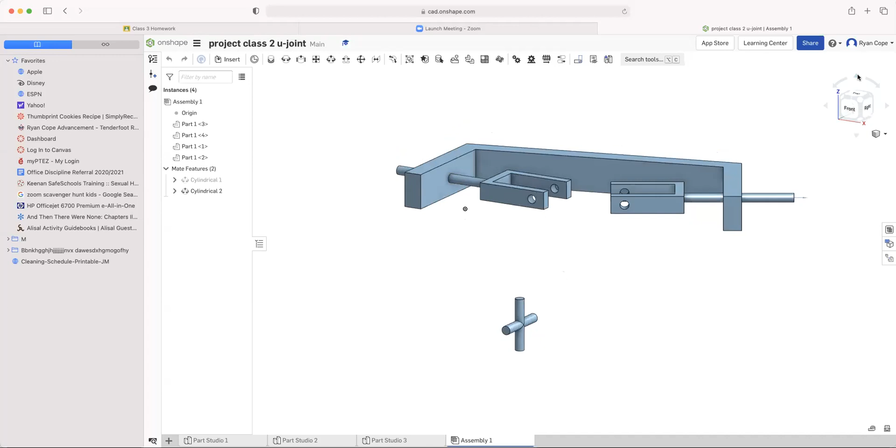He posted the photo of how to do it, but I couldn't access the photo, so I haven't done it.

For future reference, I think you should be able to access the slides on Google Classroom, and the picture will have been at the bottom of the slides. That's okay if you couldn't find it though.

If you go back to Onshape, it's pretty straightforward. So you have your cross there, right? Yeah. What you'll want to do is make a revolute mate with the circle on the inside of the clevis fork. Make sure the end face of that matches up with the outside face of one of the clevises.

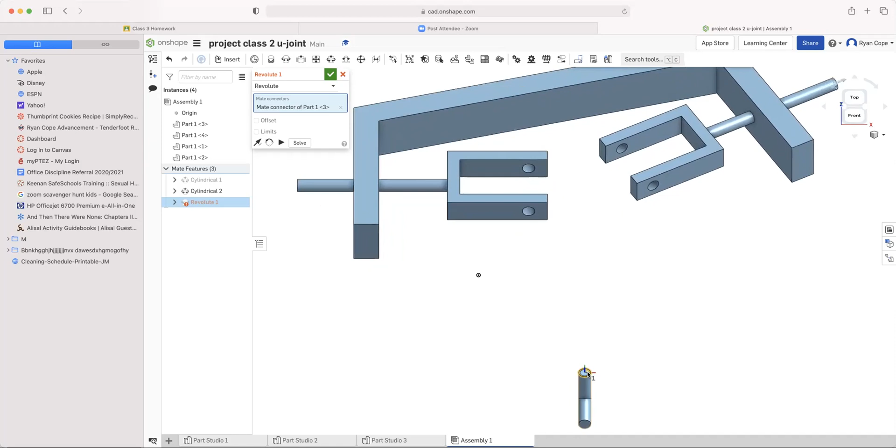Where do I attach it? Do you see the clevis, that outside face you were just hovering over? Yeah. If you click on the circle where that hole is, it should be able to mate to that. You can imagine that the little cross will be inside the fork. Right here? Yeah.

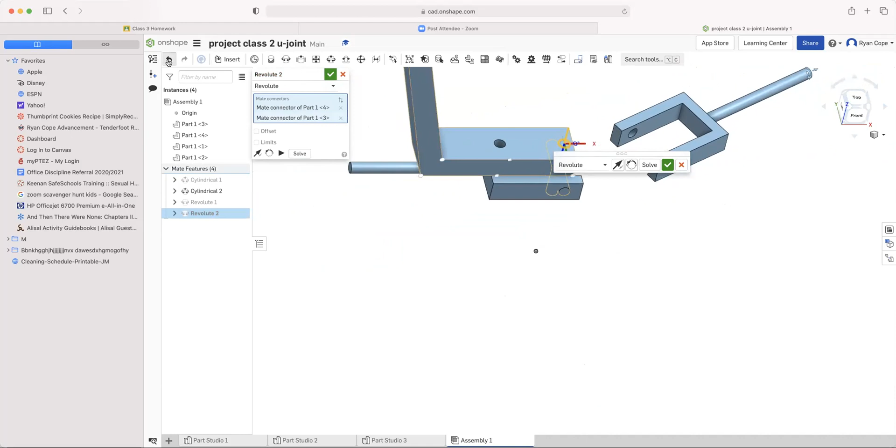All right, so that's your first mate. Now the other mate is exactly the same thing with the remaining two parts of it. I think you selected something you didn't want there. You take just the outside face of the other fork and you pick that other part of the cross.

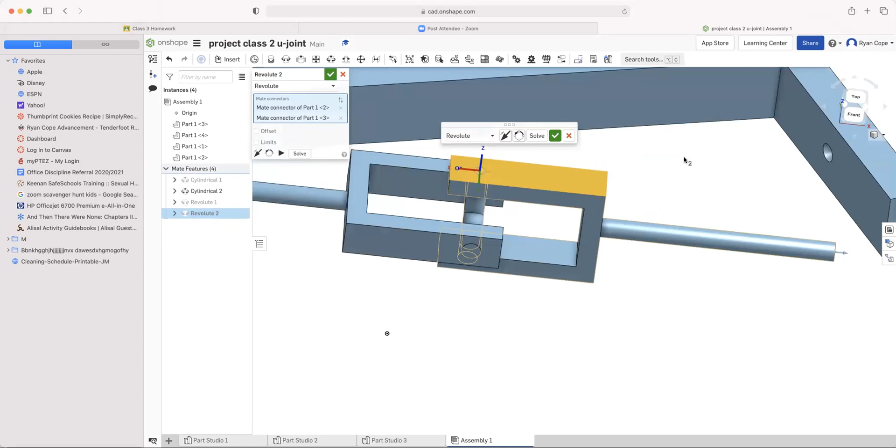And if you accept that and solve it, it should work. Yeah, so that looks good.

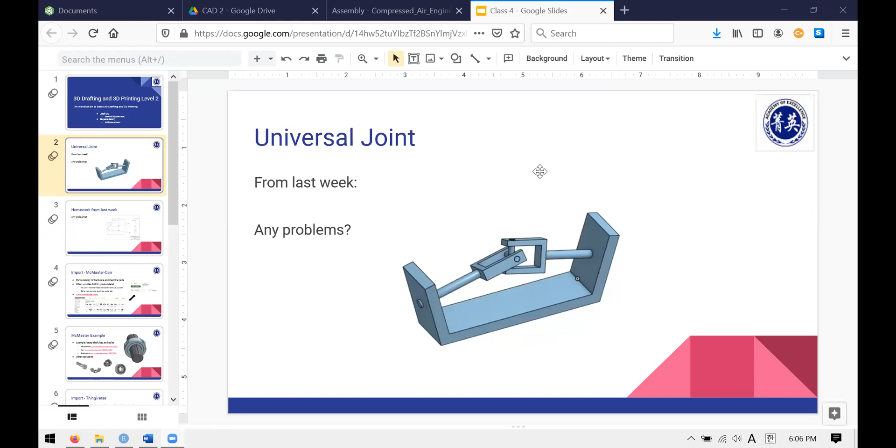The other thing that Jack asked you to do for this week was to model this base plate. At this time, I'll take any questions or problems. We can look at some problems you had with the base plate together. So just speak up, tell me if you finished it, if you didn't finish it, what your status is.

I finished it, but I don't know if it's correct, my dimension. So are you able to check it for me? Sure, we can do that. Why don't you share your screen?

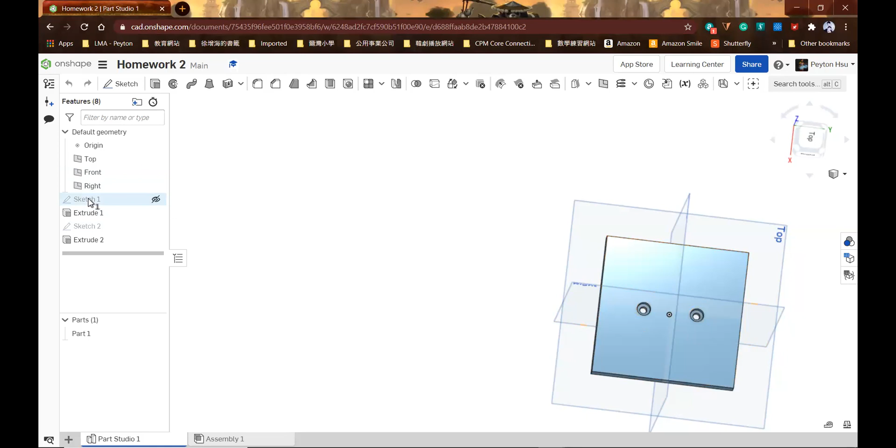So this is my first sketch I created. Oh, is this better? Yeah, that's better. All right, let's see. What part do you think might be, or what part do you want me to look at? I don't think this is the problem.

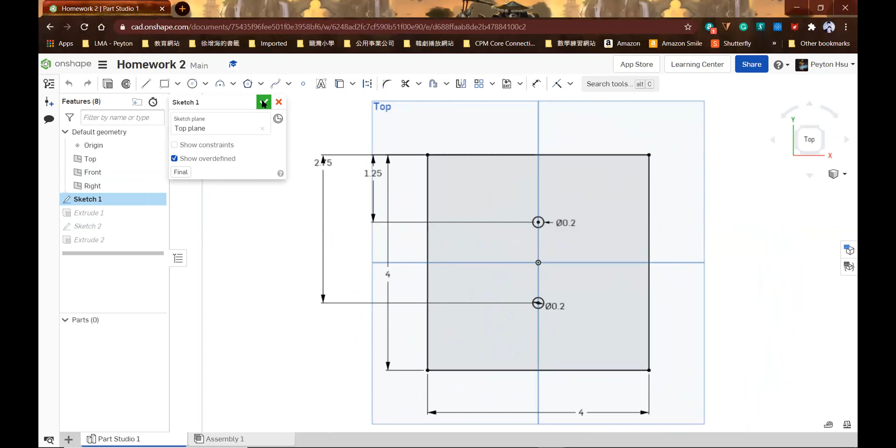I think it's the second circle. I don't know if this is 0.375. That looks right to me. The largest diameter of the hole should be 0.375.

So are these correct? Looks right to me. Huh? It looks right to me. Okay, thank you.

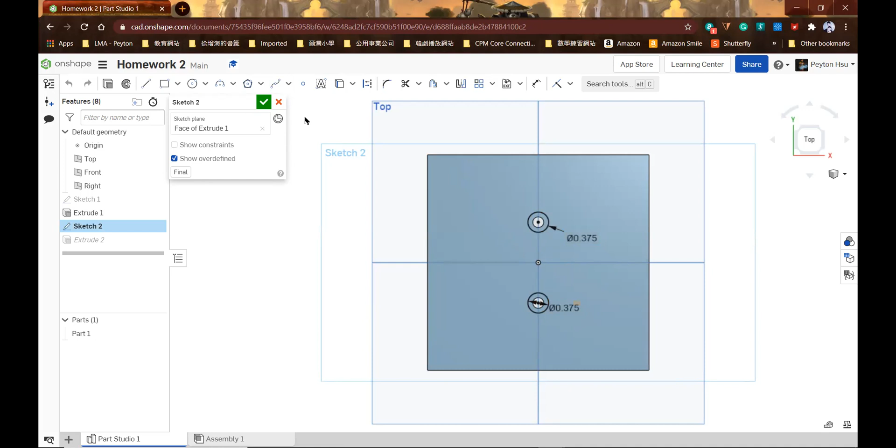All right, anyone else want to talk about the base plate?

Actually, I don't think I meant that base plate. I meant like for my U joint. I did the U joint nozzle and I did the cross thingy, but I didn't do the thing where I'm supposed to slide everything in.

So did you also not do this base plate? Wait, oh, sorry.

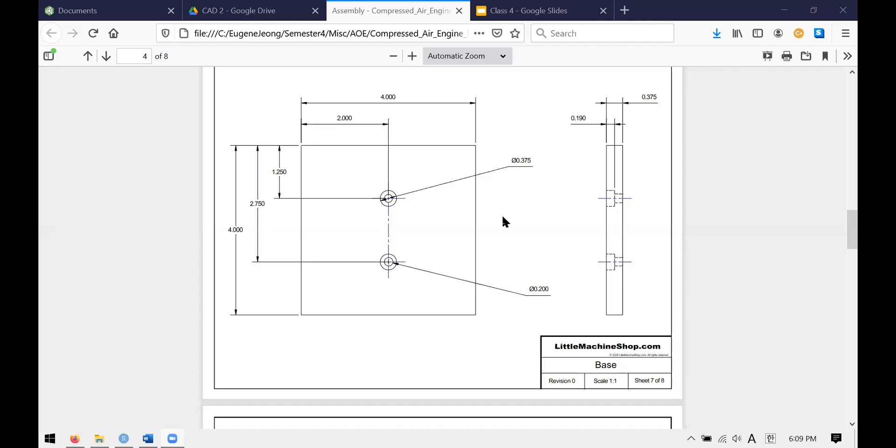Were you able to CAD this one? Oh no, because I couldn't get onto this. Or were you having a problem with Onshape? No, I just couldn't. It's hard to explain, but I couldn't get on.

So okay, we'll work through that after class. All right, can you log into Onshape right now? Because we'll be working on something together during the class period.

Alex, are you able to use Onshape right now? Yes. Okay, that's all that's needed at the moment.

So for everyone who couldn't finish the U-joint, as a blanket statement, just focus on this assignment and moving on. Like just start with the base. And if you really want to, or you have extra time, you can do the U-joint, but this one is more important since we will be using it in the coming weeks.

So if no one else has any comments about the base plate. So I should create a new document and create the base plate thing. Right, just make sure you have that for next class. Okay.

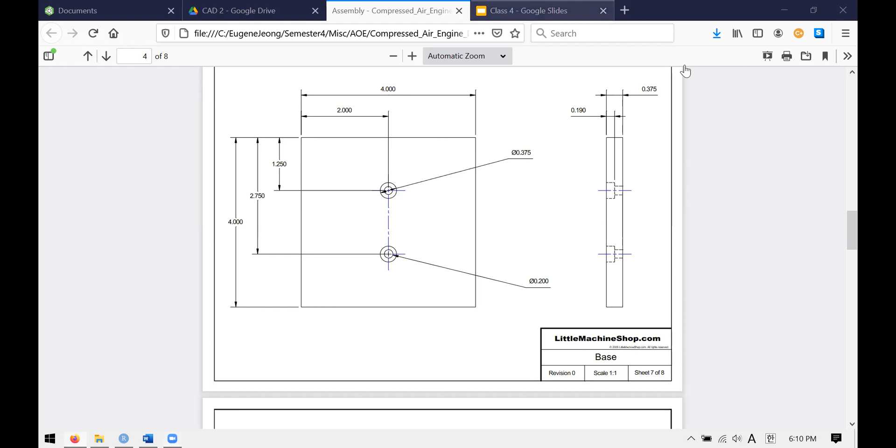Anything else about this baseplate before we move on?

All right, so now for the topic of this week, which is looking at importing parts into Onshape and parts catalogs and things of that nature. And so the first topic that we'll be talking about is a catalog called McMaster Carr.

So this is something called a part catalog. It used to be this really big telephone book-like book where you could open it up, look for whatever hardware or machinery parts you'd want, and then you could order it. These days, it's all on a website. And if you look through this website, almost every part you can think of, whether it's bolts, nuts, screws, bearings, replacement parts for your bikes, things like that, are all available on McMaster. It's often used in engineering for selecting various standardized parts for you to use in your designs.

One really cool thing about McMaster is that it often provides a CAD model of the part in its product detail. So when you're designing a part that has a lot of screws in it, there's no need for you to model every single screw by yourself because it's a standard part that's always the same. What you can do is download the screw or whatever it is from McMaster, and that's what we're going to look at today.

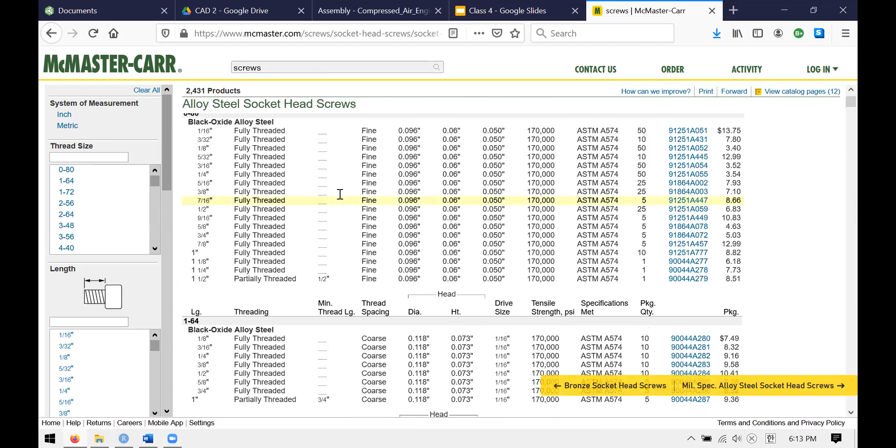And it would take me to this huge list of all these different kinds of screws. So how do I know what kind of screw I want? The first thing you might look at is the thread size. This is something that will come up shortly, but just to give a very brief overview of how screws work, most standard screws are described by two numbers. In this list, you can see there's a long list of one number dash another number. The first number describes how wide the screw is, that is how big a hole you need to put that screw into. And the second number describes the threads per inch.

And what that means, if you look at the screw, there's two parts, right? There's the head, which is where you put the screwdriver in, and then there's the long body. On that body, there's that spiraling part, and those are called threads. So the second number just describes what kind of threads that screw has.

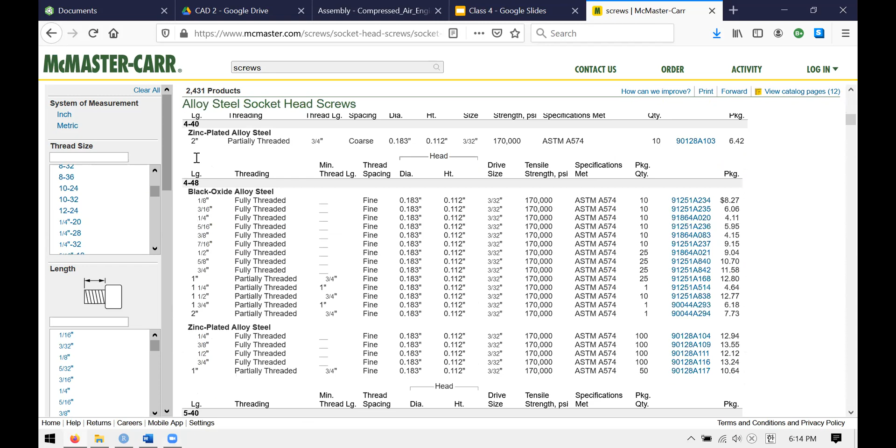For my part, I can just scroll down. Let's say that I wanted a 6-32 screw. Once I scroll down enough, I can see the entire selection of every 6-32 screw available on McMaster, and I can pick from these the length that I want. That's enough for me to land on a single unique screw, so let's say I want this 1 1/4 inch fully threaded 6-32 screw.

I want to put this into my CAD model. What I do is click it once, and I can click on the product detail. Not every product on McMaster has this, but a lot of them have this CAD icon, which means you can download the file. So you click this little dropdown, pick step, and download the file that way.

I'm going to do a longer demonstration of importing the part into Onshape, but for the moment, just take a moment to look around and explore the different types of parts you can buy. There's a lot of really crazy stuff here, and I'll let you explore. If you find anything really cool, feel free to type it in the chat and I can take a look.

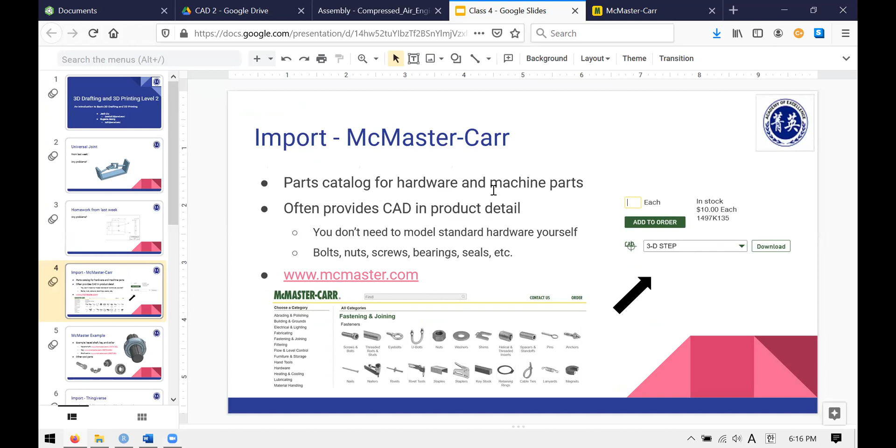So that's McMaster for you in a very quick overview. Now we'll go on to our example where I bring Onshape into this, and show you how you can use these models to make something interesting for yourself.

Each of these parts I found on McMaster. You can follow along, though you don't have to—I'm just going to show you how I'd download each of these parts. As before, I find myself on this product page. It has a little CAD symbol, so I know it offers a model. I click the dropdown and click step, and I can download that.

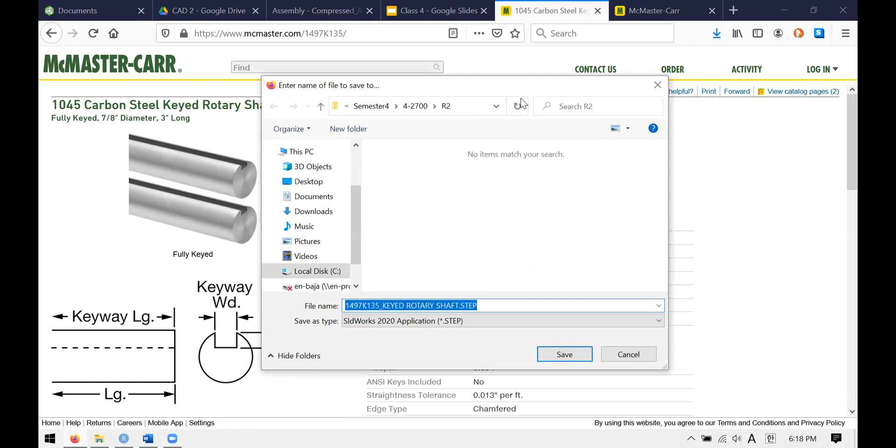Just like any other file, you can save it into any folder on your computer, maybe into downloads. And now that file, the 3D model of the shaft, is on your computer.

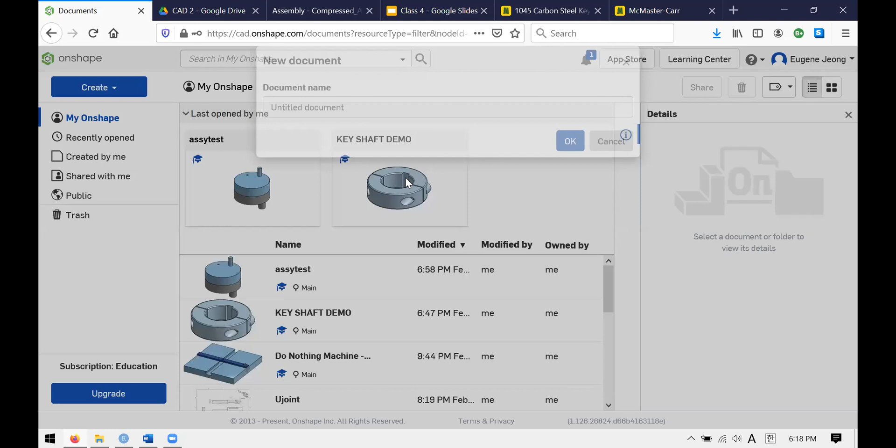Now we'll go on to Onshape. At this point, everyone should open up their Onshape if you haven't already. I'll make a quick demonstration—I've created a new document, nothing in it so far.

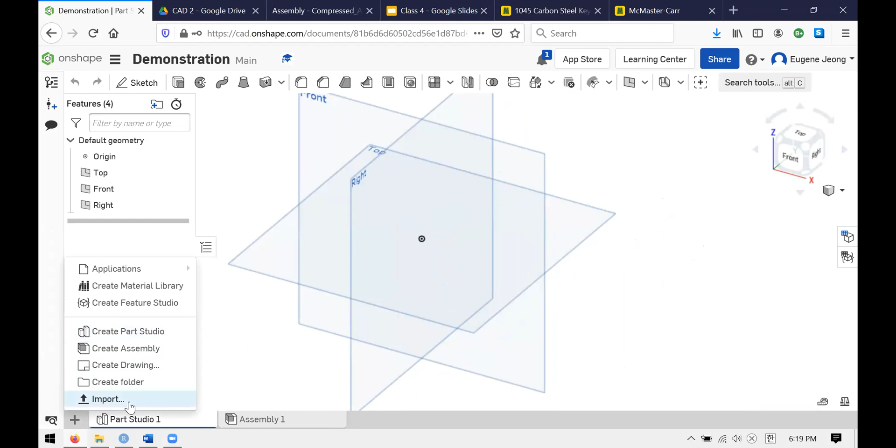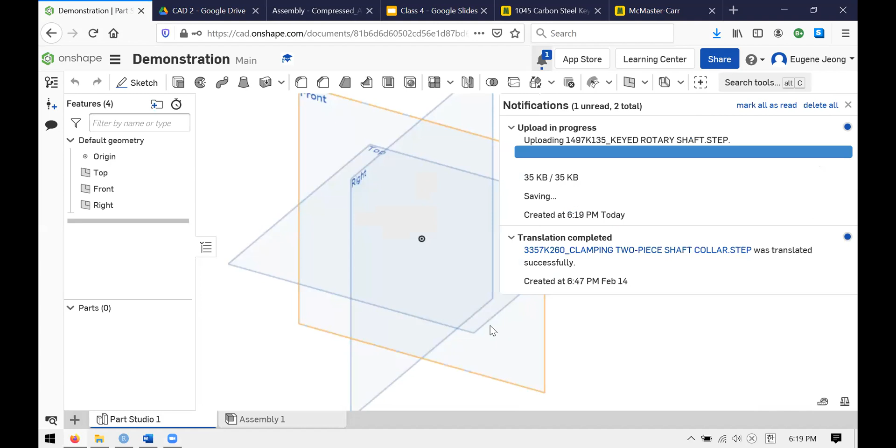Let's say I want to put that shaft into my document. I can insert a new element using the plus sign, and instead of creating a part studio, I click import. From there, I navigate to the folder where I saved that file. If you open the file, it brings up this dialog option—the default settings are fine. If you press OK, it takes a couple seconds, but it imports the part. Now I have that shaft I saw on McMaster, this 3-inch long shaft with the keyway channel, in my document.

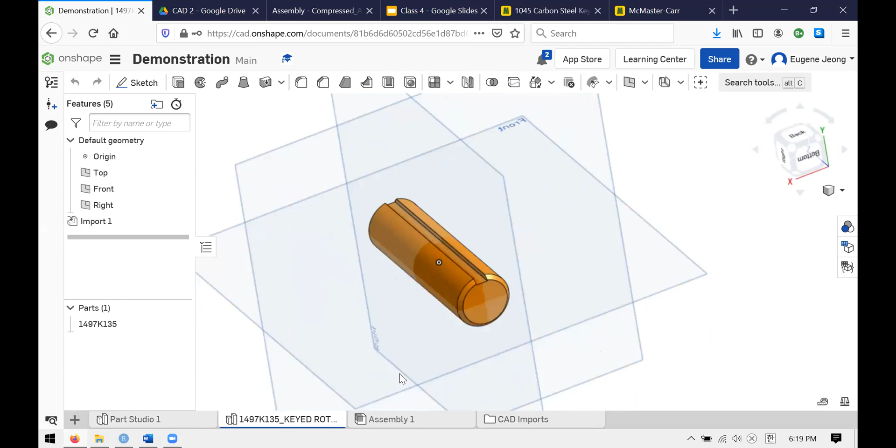So I can make an assembly with this, or modify it if I wanted to—it's here. I'll demonstrate that one more time for the shaft collar: again, you go to the product page, and you click download.

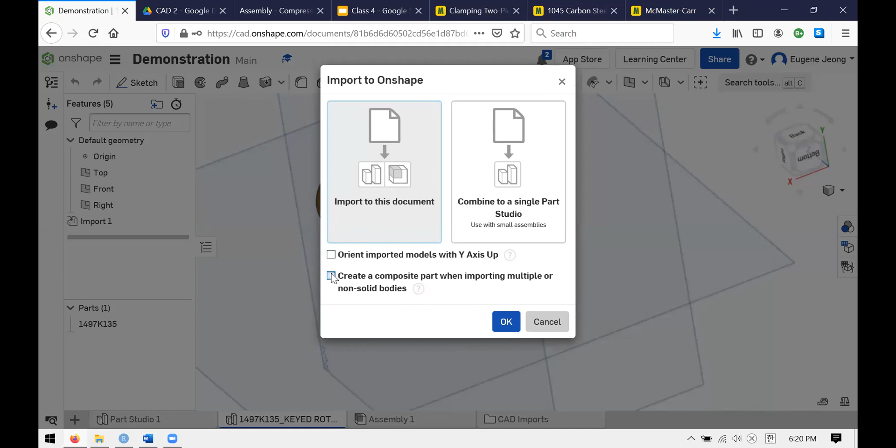Now this one is a bit different because the shaft collar, as you saw, actually consists of multiple parts. It has the screw on the side and it has the 2 C-shaped halves of the collar. So when you import something like that, where the model has multiple parts in it, you have the option of creating a composite part when importing multiple or non-solid bodies. What that means is if you're importing something that has multiple distinct bodies in it, like the screw and the 2 C halves of the collar, it just imports that all together as one body, or if I don't check it, as separate bodies. That's something to keep in mind if you ever do something like this on your own.

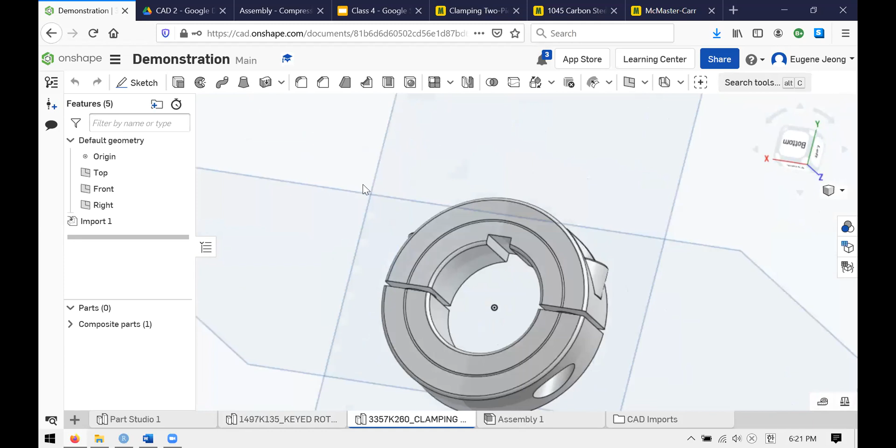But if you give it a second, it'll show up. Since I checked yes on that option, this whole thing now came in as a single body, so everything's attached to each other, which is what I wanted.

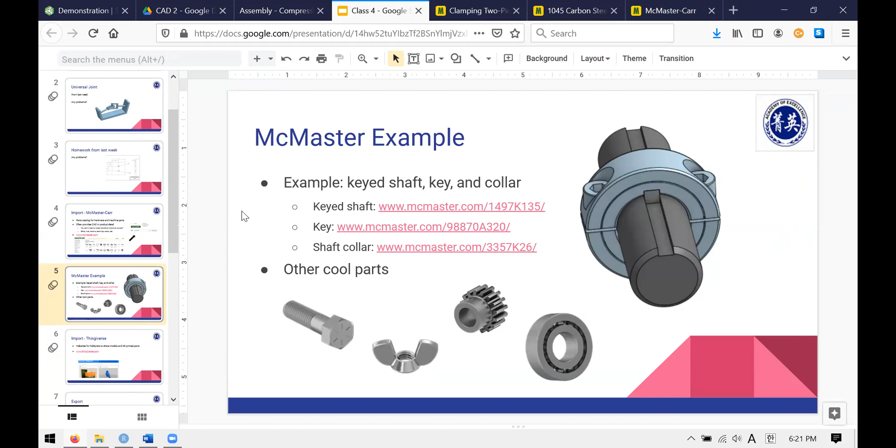All right, so that's McMaster. If you want, you can play with that in your own time. It's very useful. I use it all the time in my own school classes and for my own projects.

The next thing I want to show you is a different kind of website. This is Thingiverse. If you're interested in 3D printing or hobby making of things, this is a good website where a community of hobbyist 3D printers or model makers submit things they've made for everyone to enjoy. I'll put the link into chat as well.

So this is a bit different from McMaster, where the parts you find aren't necessarily standard hardware like screws, bolts, or bearings. Instead, it's just things that people wanted to make. There is a search option, and I'll give you another moment to look through this on your own and see what you can find.

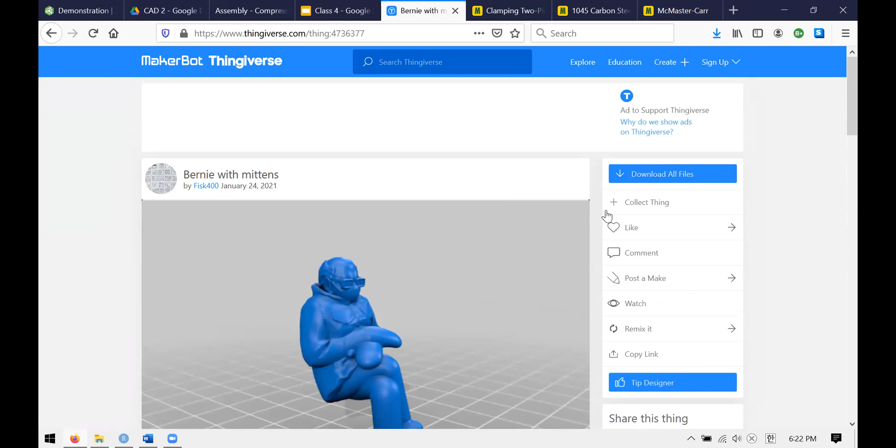I'll demonstrate how you can download models. Let's say I really like this statue. I click on it and it brings me to this page, and then I can download all the files. There's a short countdown, and after that it prompts me to download that file, which you save like any other file onto your computer.

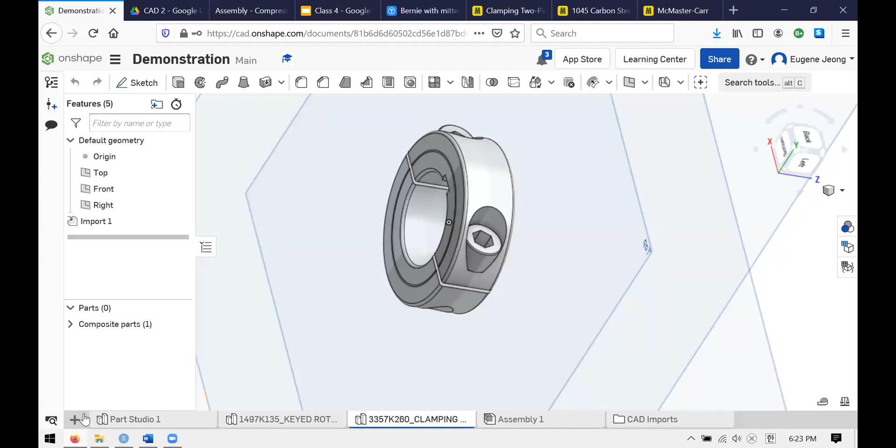What's often the case is that it gives you a zip file, so as you might know, you can just right-click it and extract all, and it puts the file onto your computer. Just like we did with the McMaster screw, you can import that part by navigating to it and selecting it. Once it finishes, that part will also just be in your document. So if that's something you wanted to 3D print, that's how you would first get it onto your Onshape.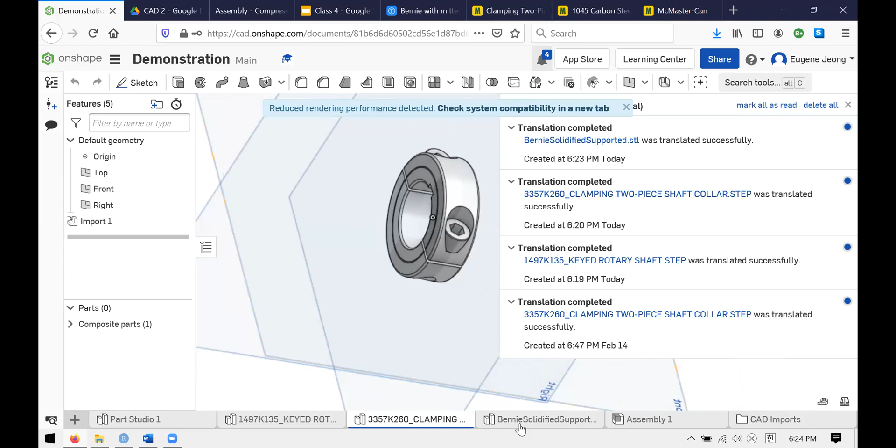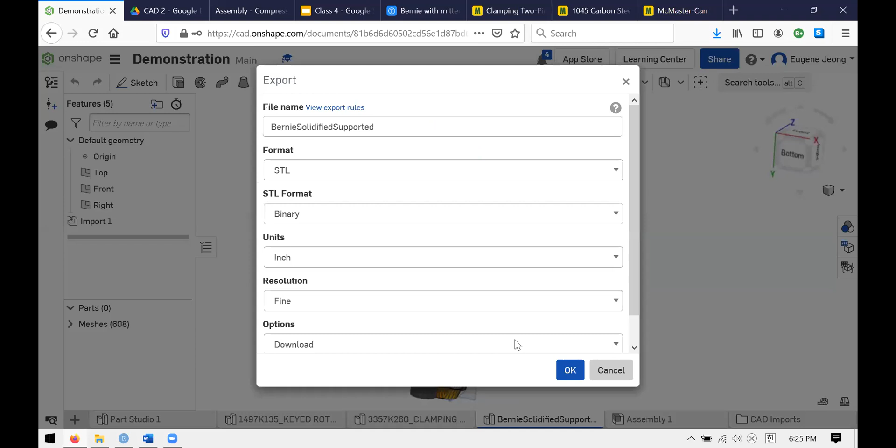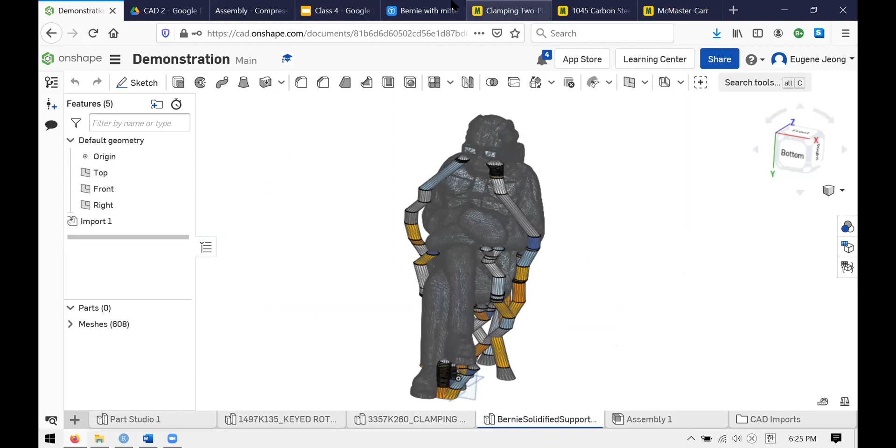Let's go to this statue that I downloaded a second ago. Here it is, and let's say I want to move this onto my 3D printer. What you can do is right click on that tab, click export, and in the format you just pick STL. You can adjust this if you want, but we'll talk about that in the future. You can just download it, and that'll put an STL file of the model you made onto your computer. That's one of the first steps in the 3D printing process.

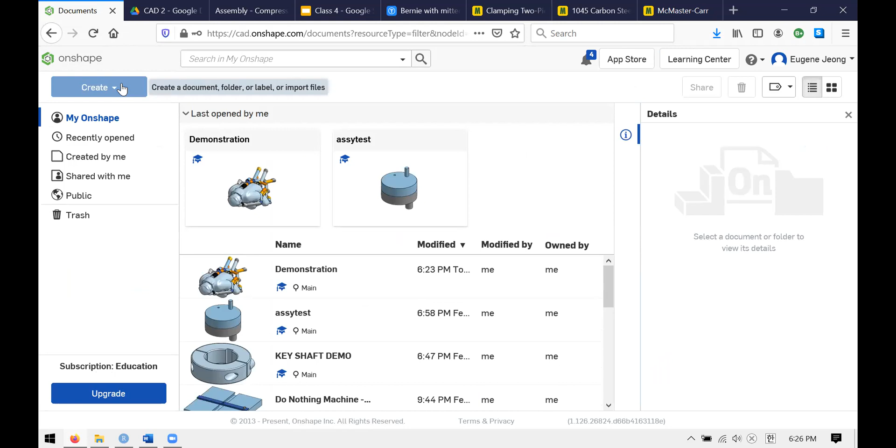So we'll begin today with the cylinder. Again, we're modeling from a drawing, as we talked about in previous classes. If you've already made your base plate, I want you guys to work in the same document that you made the base plate in. Here, I'm just creating a new document for the demonstration.

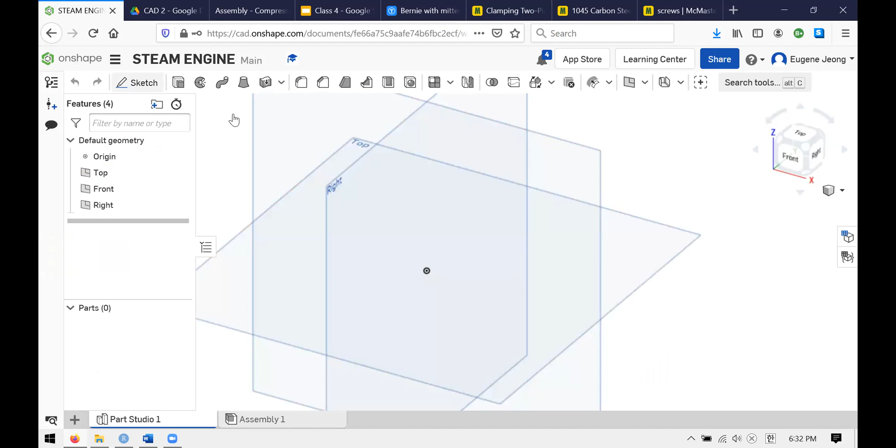So yeah, at this point, I'll start making the model. You guys can follow along or go at your own pace if you've already started. But the way I'll go about this is start with a little square.

I remember from my drawing that when you look at it from the top, it's a 1x1 square. So I just made my 1x1 square.

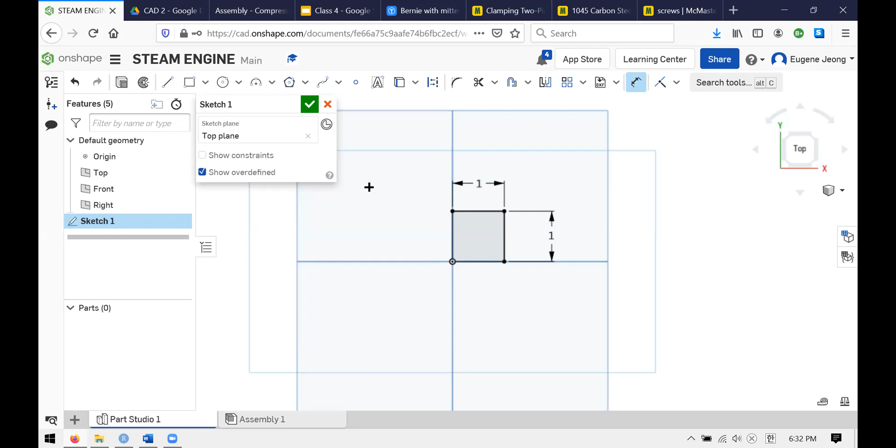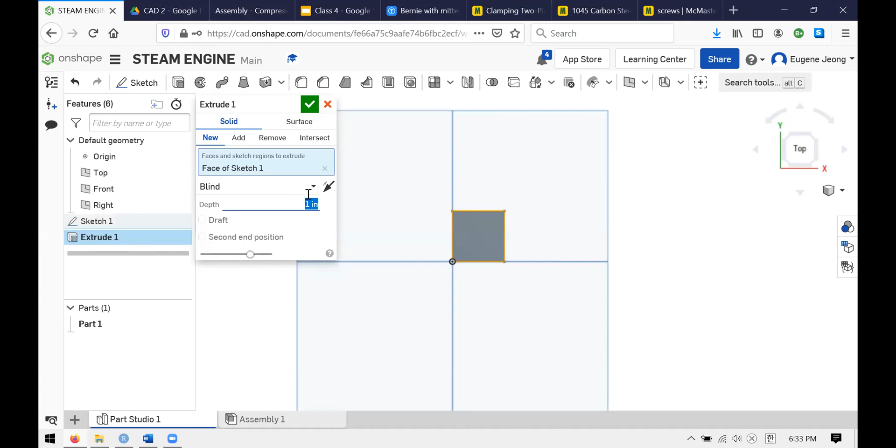And then I want to extrude that square. And to know what height I want to extrude this to, I look back to my drawing and I see 1.875 as the total height of that block. And that's what I'll make.

So now I have this block that makes up the bulk of the part. And now I have these 3 holes.

I'm going to start with the biggest hole. And I'm going to teach you something perhaps that you didn't know before, which is how to easily make that drilled feature with the pointy tip in one feature.

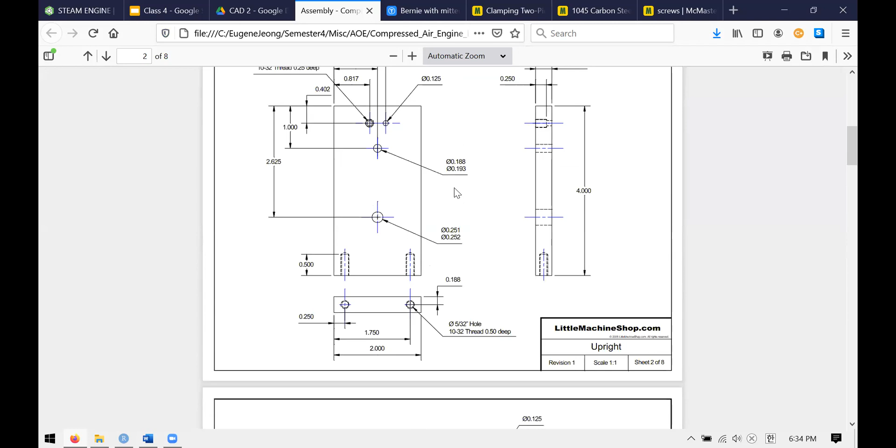Yes, Peyton? Where are the dimensions? Like, is it in Google Classroom? Oh yeah, the drawing is in Google. The slides are in Google Classroom. There's also this PDF file that should be in Google Classroom as well. And if you scroll, you can see a bigger version of the image. I guess at this point, I should probably get the Google Classroom code for Andrea. Is that your question?

Andrea? Wait, how tall was it again? 1.875. Okay. Do you need the Google Classroom? Does anyone need the Google Classroom code right now? I don't have it right now.

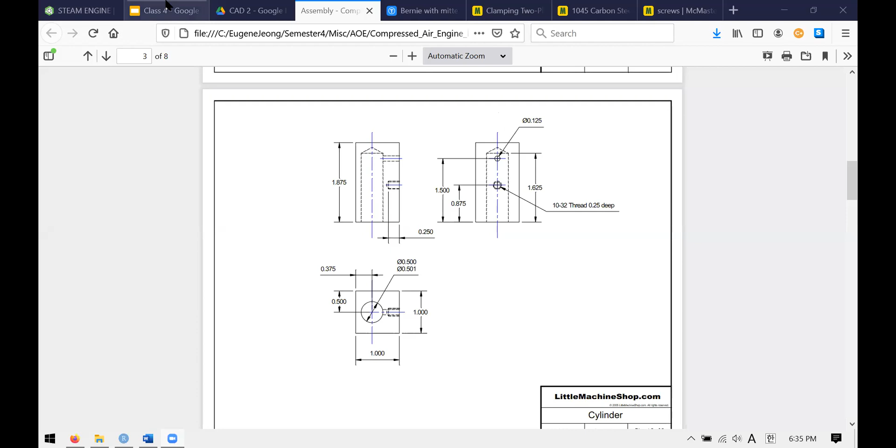So the next thing I'm going to do is work on this large hole. I'll make a sketch, pick this top square plane, and on this plane, instead of making a circle, I'm going to pick this point tool and put a point, a little blue dot, on my sketch.

And if I look here, I know that the center of that circle, which is what I made that dot for, is 0.5 and 0.375 away from the corner. So I click the dot.

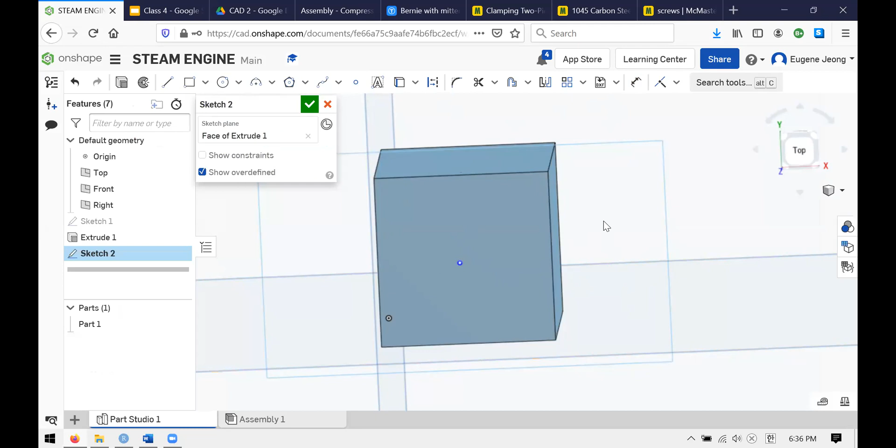I click this - wait, that kind of looks like a square to me. For me, I got a rectangle. Do you mean this? Oh, oops. Yeah, I couldn't see that.

Okay. So when you have this rectangle, I just want you to make a new sketch on this square. So you're right that it was a square - I was just looking at it head on.

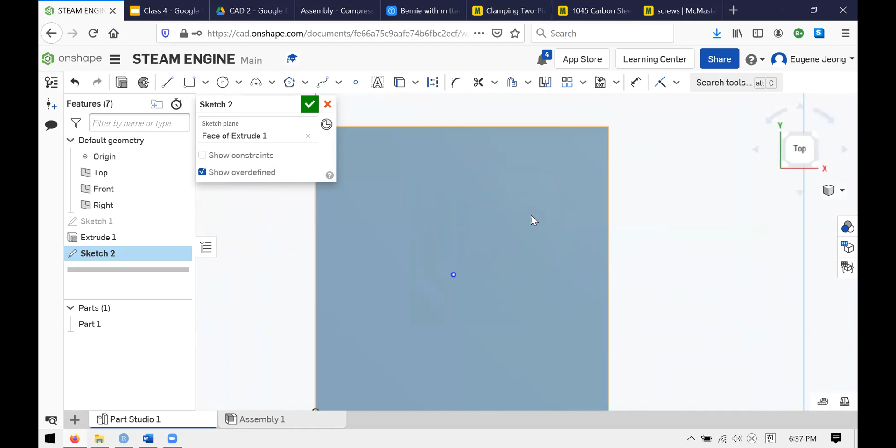Andrea, do you still have a question, or is your hand raised from before? Okay.

So as we were doing, you click the line, you click the dot with your dimension tool, and you make that 0.5. Wait, where did you make the dot?

So in your toolbar, there's a tool called point. It looks like a small blue circle, and it's between the spline tool and the text tool. You can just click on it once, then click on the square somewhere, and it should place a dot. Let me know if that works.

Yeah, it works. All right, so I just want you to dimension it as we see in the drawing: 0.5 away from the top, and 0.375, or 3/8, away from one of the sides.

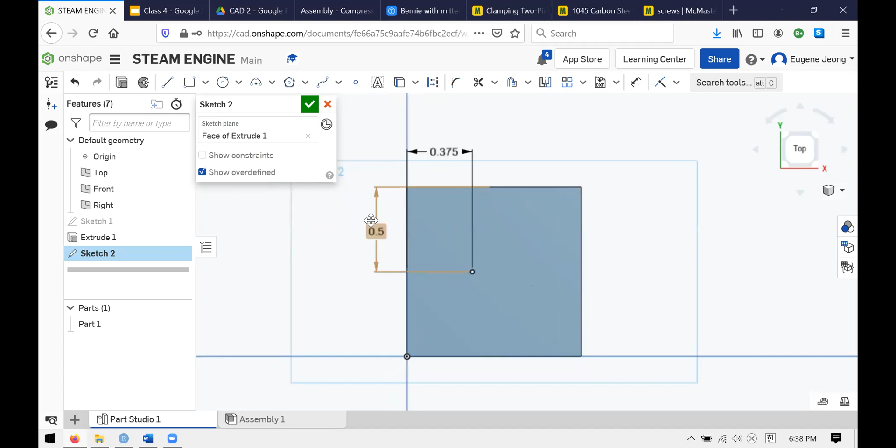Wait, what were the dimensions? 0.5 and 0.375. 0.5... wait, 0... and 0.375.

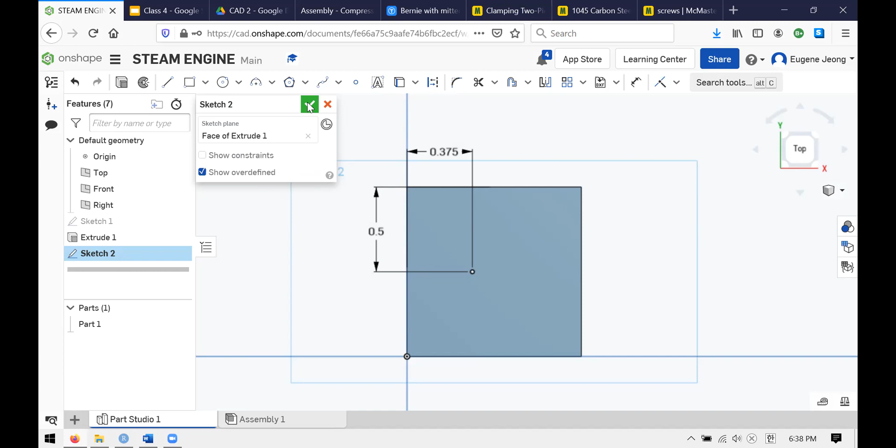I see. I'm not too sure about that right now, but we'll address it after the class. For now, could you just follow along with what I'm doing? Okay. And I'm sorry about the Google Classroom issue, but we'll make sure to look at it. I have a question. Yes. Can I share it? All right.

For this one, I didn't get how to dimension it. That's 1 inch and 1 inch.

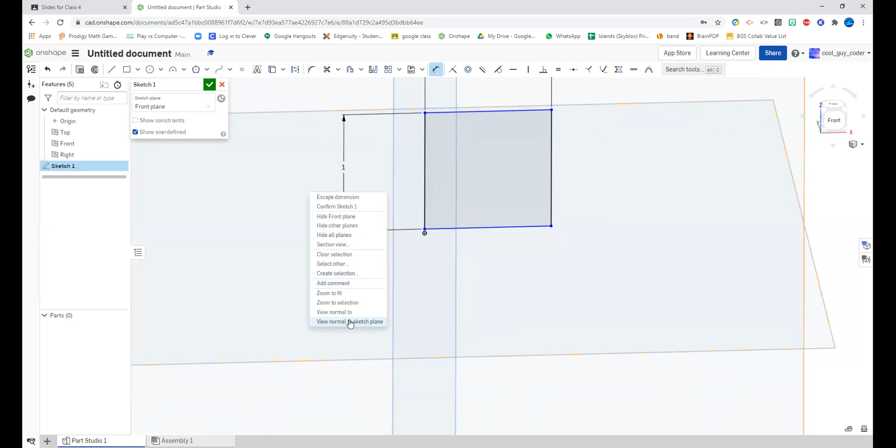No, I didn't get the square part. What do you mean? You have to put a circle in the middle and dimension it to 0.375. Sorry, it's hard for me to hear what you're saying.

I don't know how to do the dimensioning. Okay, I see. So first, you can see your square isn't fully defined yet because it has some blue lines, right? Do you know what's not fully defined about this? The distance between this and this.

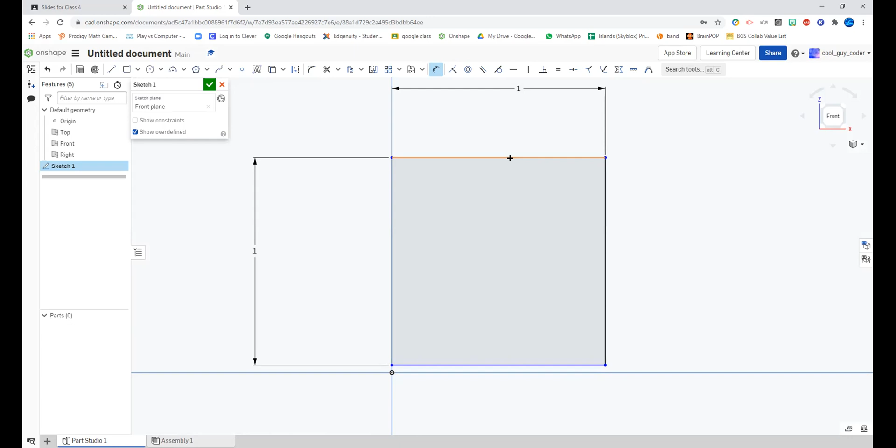Try clicking it and dragging it and see what happens. Or escape out of your dimension tool. Click the line and just drag it. So the position of that square was what wasn't fully dimensioned. Oh.

Okay, now it's good, it's all black. Now I want you to click the point tool, which is the blue circle next to the spline tool, and just click it.

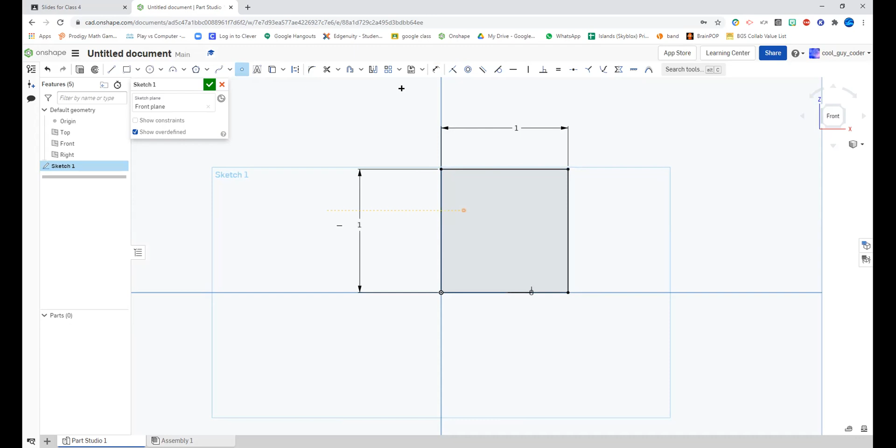And I want you to dimension that so it's 0.5 and 0.375. Thank you.

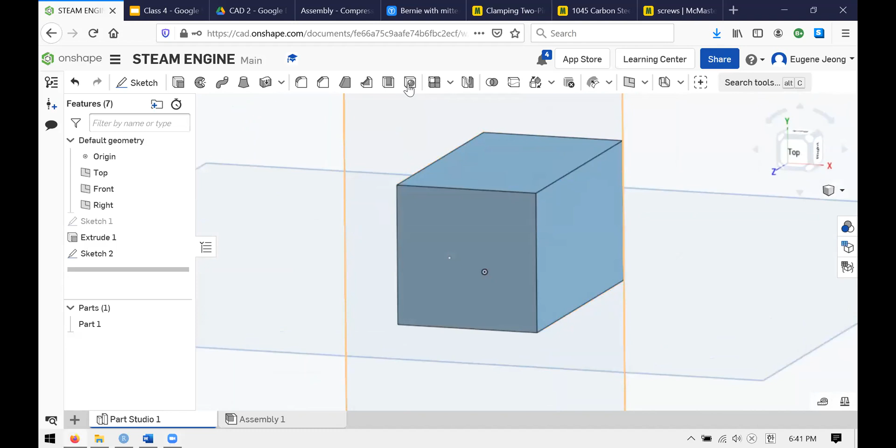All right, so at this point we have this rectangle. What we can do is use this tool called the hole tool. How much do I extrude it by again? 1.875.

So the hole tool gives us a lot of different options. ANSI, ISO, DIN, and PEM are all different standards. If you go to your hardware store and look at various screws, rivets, and bolts, they follow these various standards. But for now, we're just going to click custom.

Let's look at our drawing. Here we see it has two numbers that indicate the diameter of the hole, and that is a tolerance. It's telling the person who would make this object in real life how accurately they need to make it, no less than 0.500 inches and no more than 0.501 inches. For us, we don't really care about that since we're not making this in real life, so I'm just going to put 0.5.

For the second part, I want the depth of the hole up to this flat part, called out as 1.625. That's the dimension I can put in here.

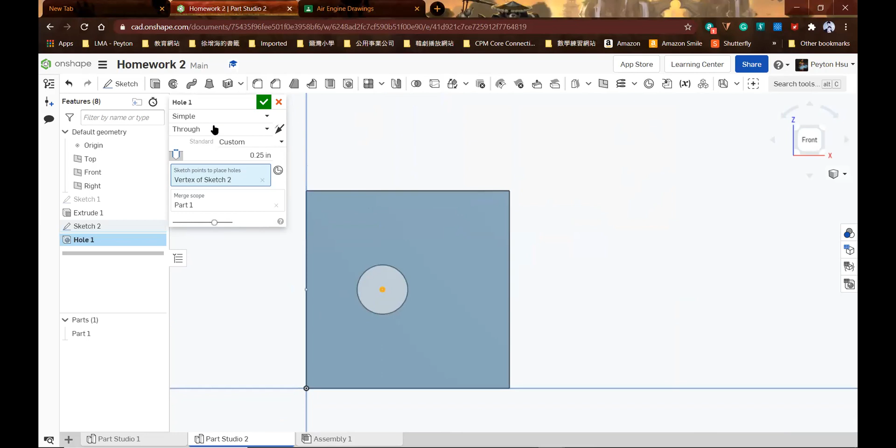Okay, so that's because you selected 'through' for your second drop-down option. What through means is it's going through everything, so you don't need to specify a depth for a through hole. If you click the drop-down next to through and select blind, now it's blind, so it doesn't know how deep it has to go — you need to tell it, and that's how you bring up the second option.

Okay, thank you. Is everyone else good with the hole tool?

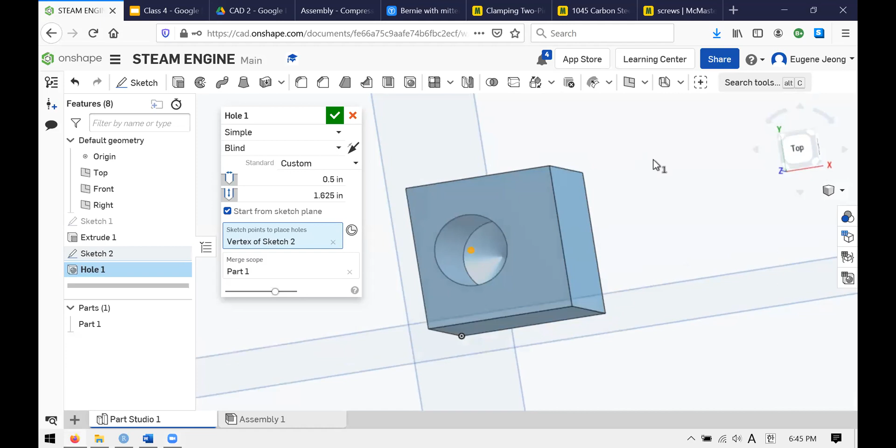All right, so I'll make that feature and you can see inside it has a little conical shape, which means it's accurate to what is made in the drawing, since it has that taper to represent the drill bit. Now there are two more holes we need to make before we're finished with this part, so we'll make those now.

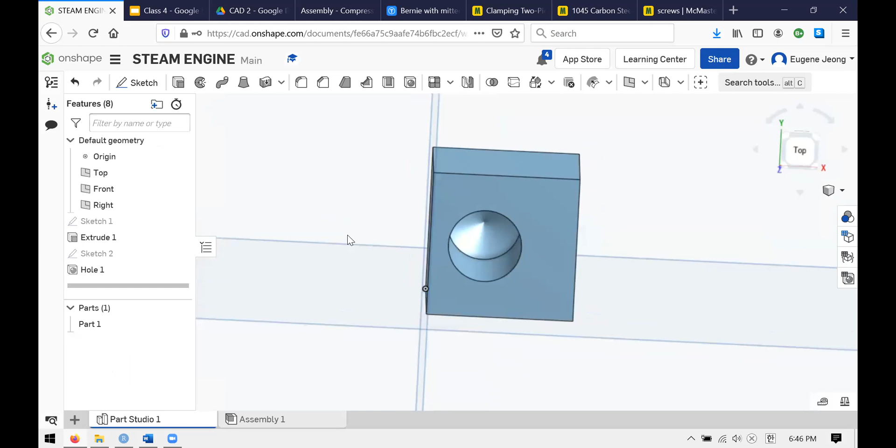This is a part where you might have to be careful. First, look directly on the top of your part. You can see that the hole we just made is closer to one side than the other, right? So we want to draw on this face where it's farther away from the hole. If you look at the drawing again, you can see what I mean — the holes go through the thicker part here.

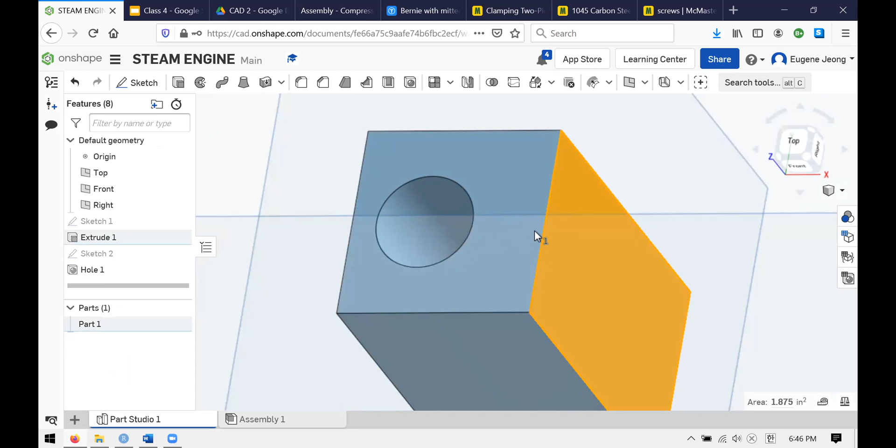So if you look at it this way, this is what it should look like. I just want you to make a sketch on this rectangular face.

Are y'all good with picking the next face to draw on?

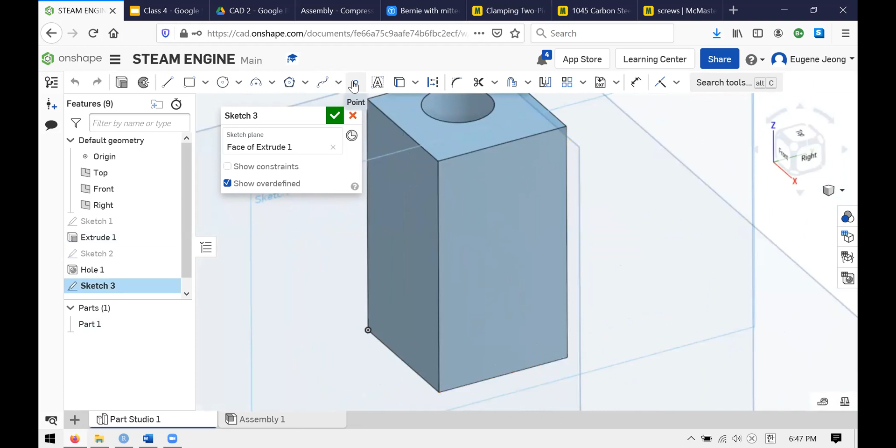As before, on the sketch, I want to eventually make 2 holes in this plane. So I click the point tool again as before. I click once to make one point, and I click again to make another point. And that's what I have.

If we're good up to here, I'll start dimensioning it. As someone pointed out before, there's a blue line that indicates symmetry, so I know that these holes must be centered. So I'll use the dimension tool. I know this is 1 inch wide, so half of 1 inch is 0.5, and that'll make it symmetric.

I click the point, I click this line, and I do it to 0.5 inches. I do the same thing for the other point: I click the point, I click the line, and I make it 0.5 inches.

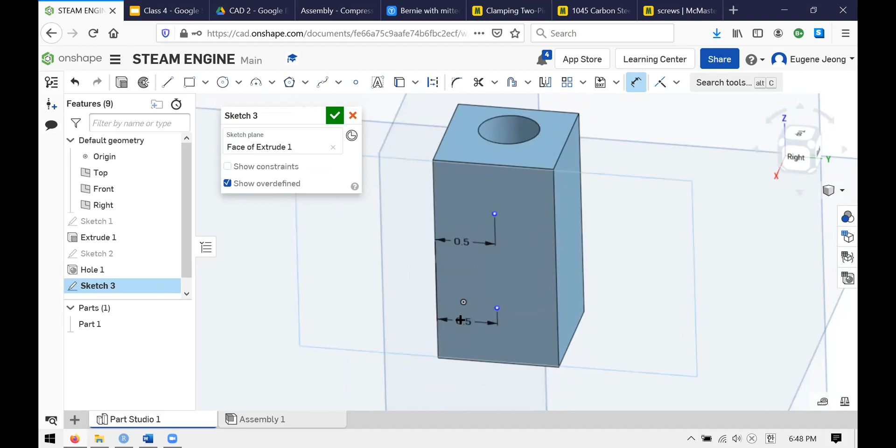Is everyone good up to here?

All right, so finally we'll do the last 2 dimensions, which determine where the points are vertically. If you look carefully, the opening of the hole is actually at the bottom of this block. You can tell because the little triangle, which is the bottom of the hole, is up here. So we're dimensioning from the part where the hole opens.

The first dimension is 0.875. So from where the hole opens, which is here, I click the line, I click the point, and I put in 0.875.

The next hole, again, it's dimensioned from the opening, 1.5 inches. So I click the point, I click the line, and I put in 1.5. That should fully define your sketch. Let me know, just type yes in the chat or give me a thumbs up if you're good with this.

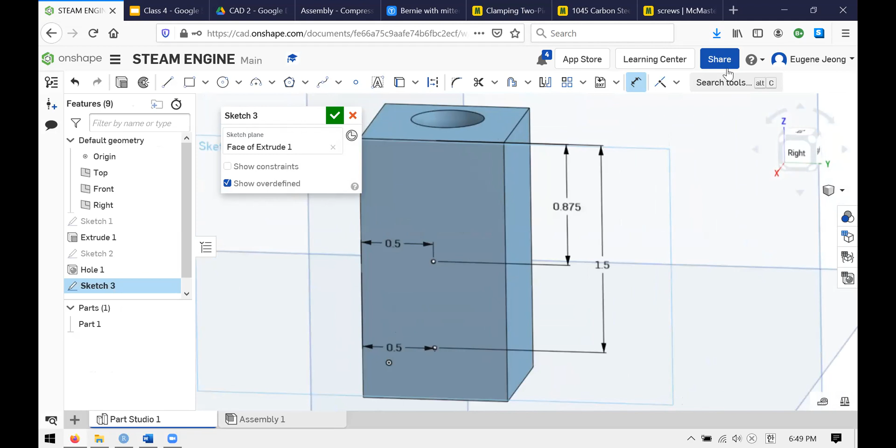All right, seems like we're all good.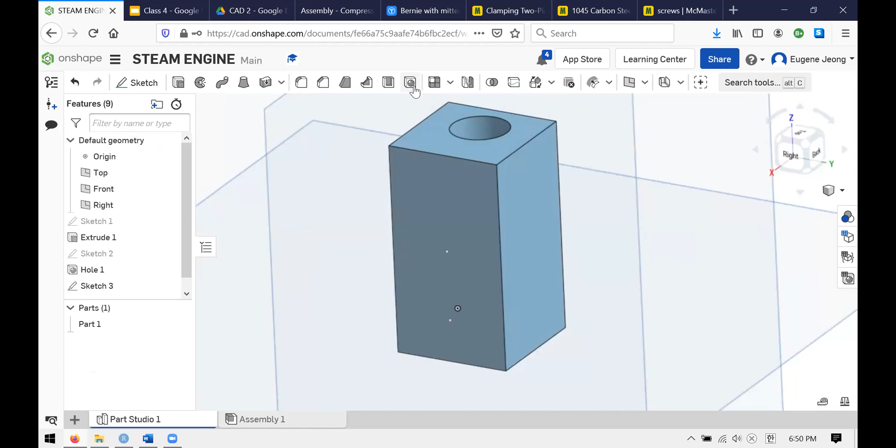So what we're going to do now is something a bit different. We see here there's the 10-32 thread, 0.25 deep. This is where the hole tool really comes in handy, because it allows you to make standard sized holes like a 10-32 with just a few clicks.

So again, hole tool: we want a blind hole, not a through hole. And we want to click ANSI. We want a clearance. And then for the size, we want to click number 10.

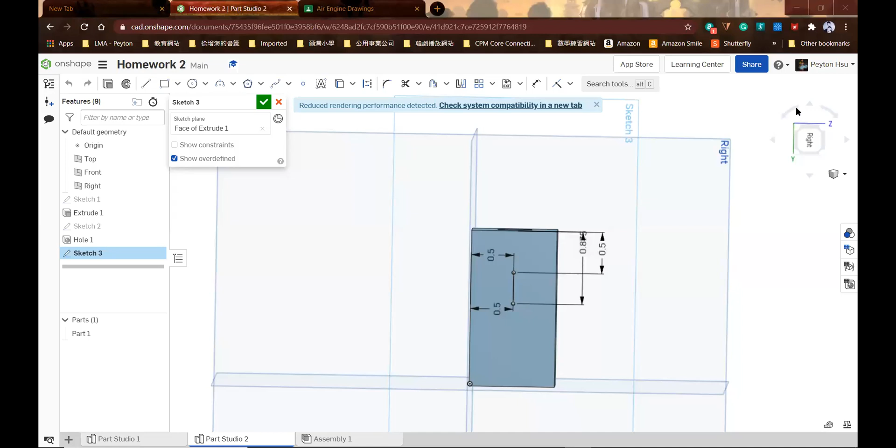Sorry, or Peyton, how come your dots are lower than my dots? When I go to sketch 3, I did the same dimensions, but mine's higher than yours. Do you want to show me? Yeah, right here. Oh, oops, but yours are down so here, that's a quick fix. It's not 0.5, but 1.5 for the dimension of that hole. Oh, okay, yeah, thank you. I guess miscommunication there.

And sorry, it's not actually a clearance hole. I misspoke there, it should be a tapped hole. So I'll run through it again: use the hole tool, you want a blind ANSI tapped number 10 hole, and you want 32 — that's what the 10-32 means in the drawing. You can leave that at 75%.

And so it already automatically fills in for you this diameter based on these numbers that you put in. All you need to specify is the depth. If you look at the drawing, it says 0.25 deep — that means the hole depth you want to make should be 0.25.

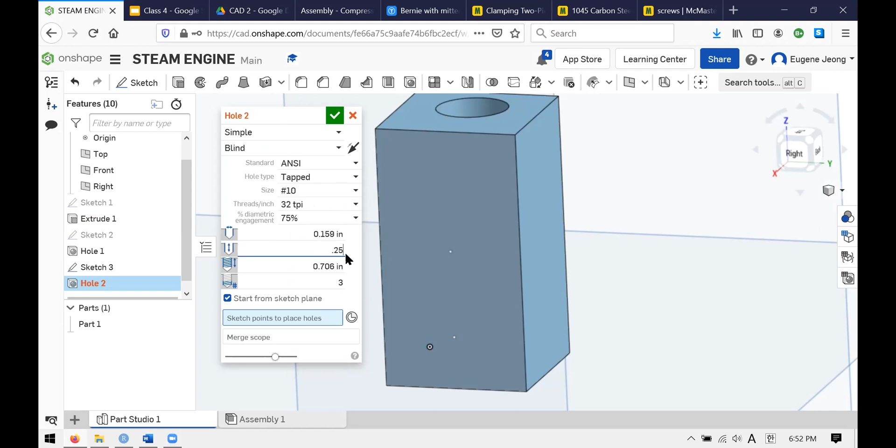And the hole that we're doing right now is the one that's closer to the opening of the hole, kind of the one in the middle. So you select that one, and that's the hole you want. Let me know if you get to this point, or if you have any problems.

Again, an ANSI tapped 10-32 hole, that's 0.25 deep. If we're all good, I'll resolve the feature. And we have our first hole.

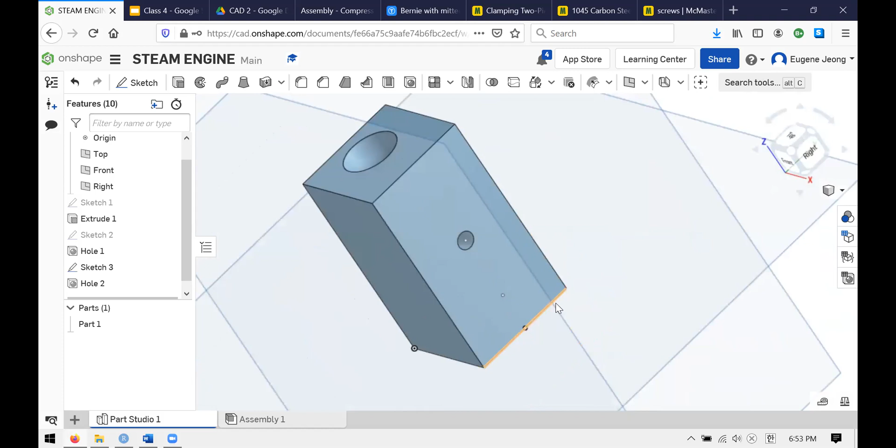Now, one thing that happened is since it made our hole with that sketch, it made our sketch disappear. What you want to do is go over to your feature tree on the left and click the eye — it'll make the sketch reappear, so you can see your sketch again with the 2 points. And we're going to now make another hole with our hole tool.

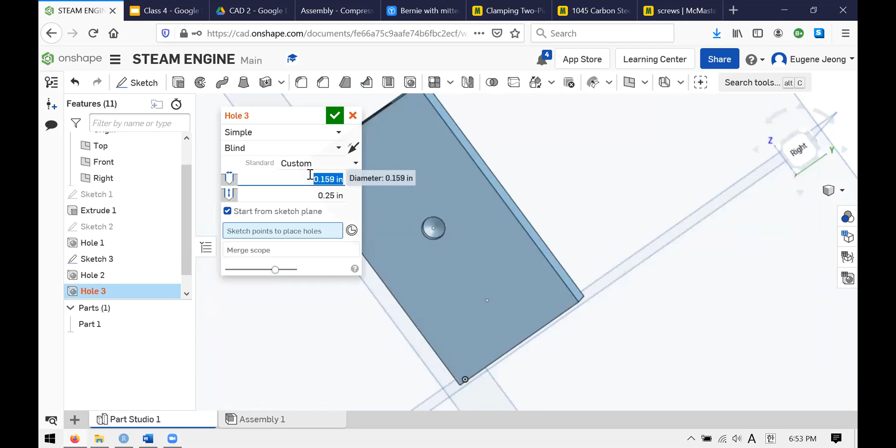Again, we're going to make a custom hole. Since the diameter of this is 0.125, we'll make the diameter 125. And we'll make the depth 0.5 inches.

And if you look inside, you should be able to see the hole come out through into the hole. So is everyone good up to here?

Peyton? Well, what does it mean by merge scope? So merge scope refers to whenever you make a new feature, you have a lot of...

I guess to explain it, let's take a different example to explain what scope means. So let's say that I make a square and I extrude it into this block. So that makes my first body, so to speak. And then let's say right next to it, I draw another square and I extrude that into a block. Now I might want those two to be one part, just together, one part that looks like two blocks, kind of like a square snowman. But I might also not want that. I might want those two to remain distinct things.

And in that case, the scope would be different, because if I want to make them one thing, the merge scope would be to part one, where part one is that first extrusion that I made. So with every feature, there's a possibility that what you're making might not be intended to become a part of what it's on. Merge scope allows you to clarify that, but we don't need to mess with that.

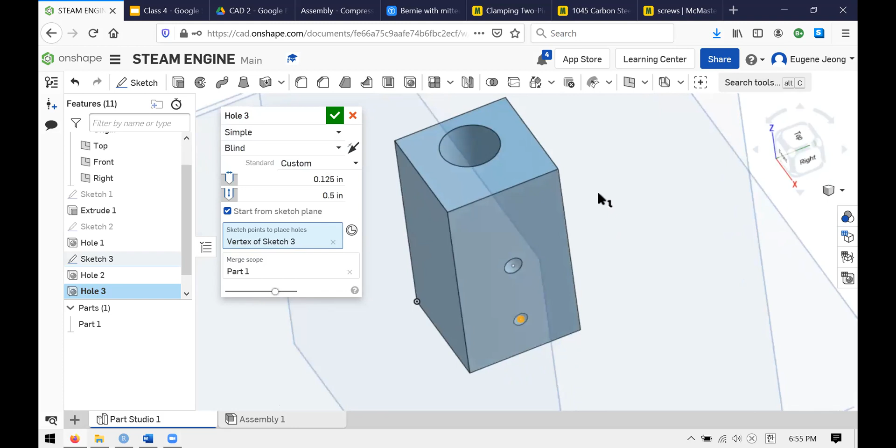Peyton? Just wondering, on the engineering side, how do we know how deep it is? Oh, okay, good question. In this case, I knew that a blind hole of 0.5 inches would go far enough to enter this hole.

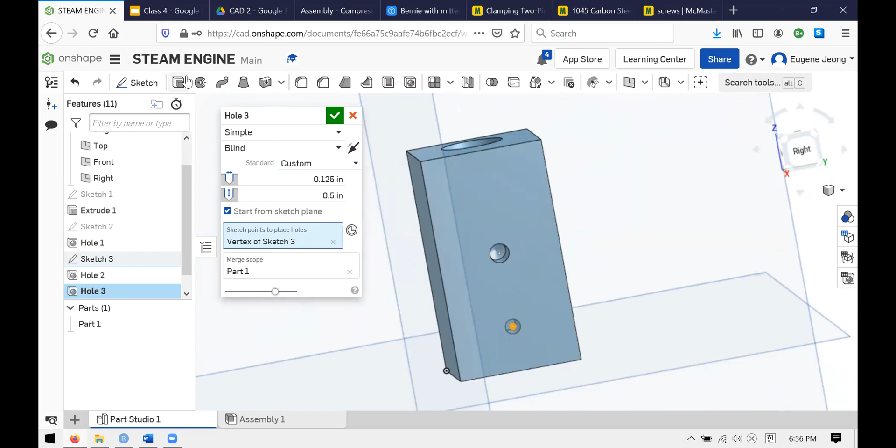And if you look at the drawing, it doesn't specify how deep it is, because it shows in this view that it goes into this hole. A different way to do this would have been, instead of making a point drawing here, I could have made a circle drawing that's 0.125 inches in diameter, and then I could have done an extrude cut. What an extrude cut allows you to do, if you remember, is an up to next. So I could have just selected the cylindrical face here as my up to next, and it would have created an extrude cut of 0.125 in diameter up to that surface.

The 0.5 was just a number that I knew was big enough to reach this hole. So it wasn't an explicitly stated dimension, but there are multiple ways that you can CAD any object, and this is one I demonstrated since we're using the hole tool a lot, to show that as much as I could.

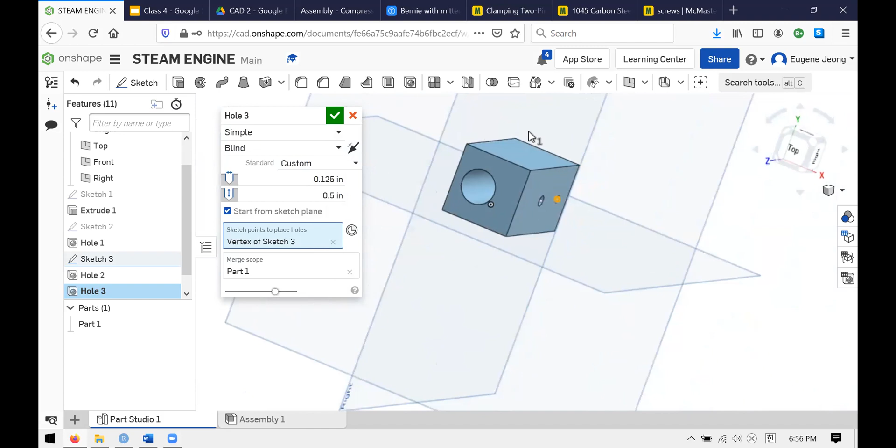Is everyone good with this object? If you don't like seeing these dots, you can go back and hide sketch 3 by clicking the eye again. But yeah, that's the completed cylinder. Every feature that's on the drawing has been made in your model.

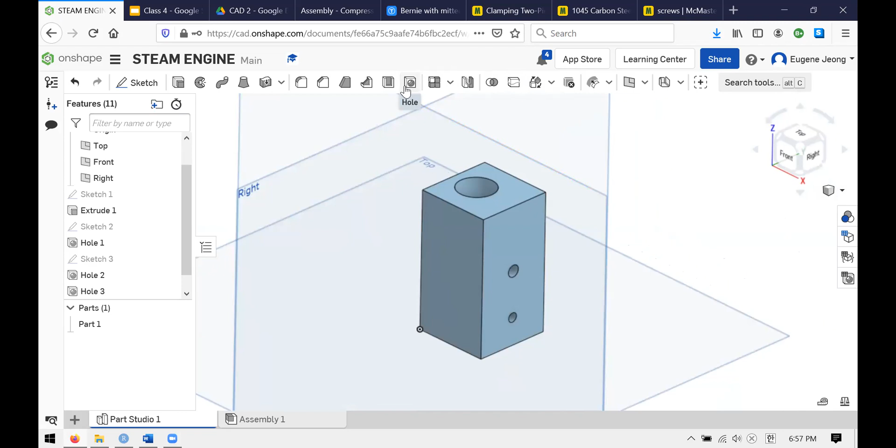So in the future, if you see a drawing that indicates something like 10-32, you know how to make that. You use the hole tool, click your standard, and click the numbers, and it makes the feature.

The original plan was to model the crank wheel as well, but that may have been over ambitious. The plan for the next few classes is to continue to model more parts of this engine. So if you see this little square thing here, that's what you just made. As we go on, we'll be making more of these parts.

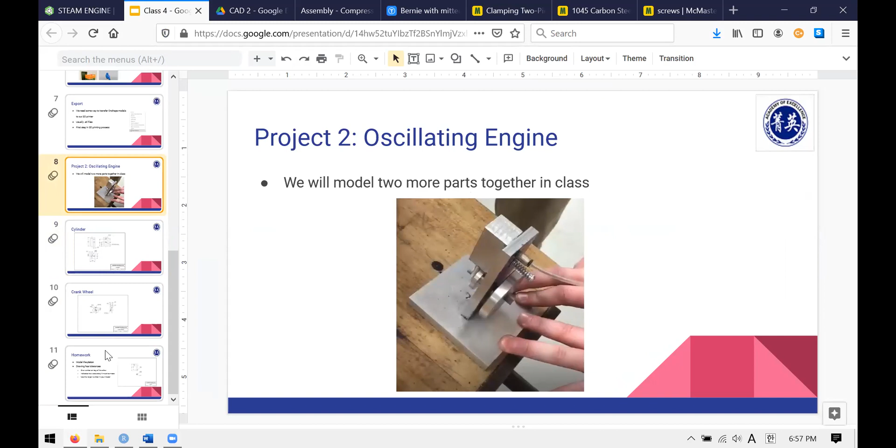For next week's class, I want you to model the piston. On Google Classroom, there's a PDF with all of the drawings for this engine, and the slides are also on Google Classroom. So the drawing is here. The part is called piston, and it looks like this.

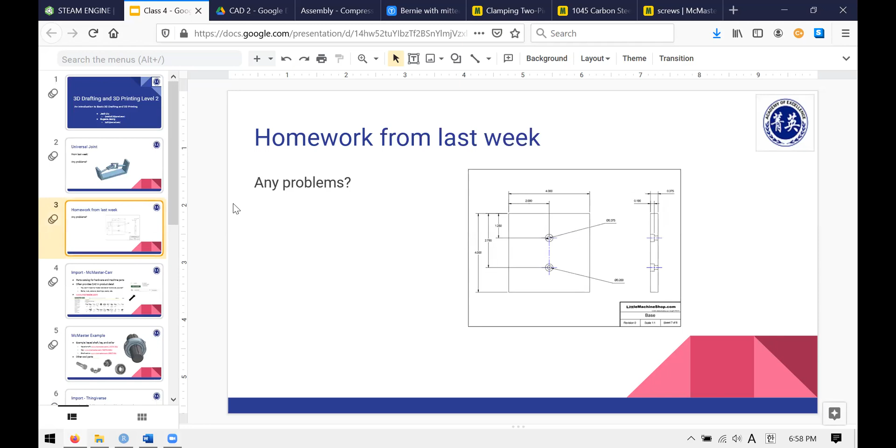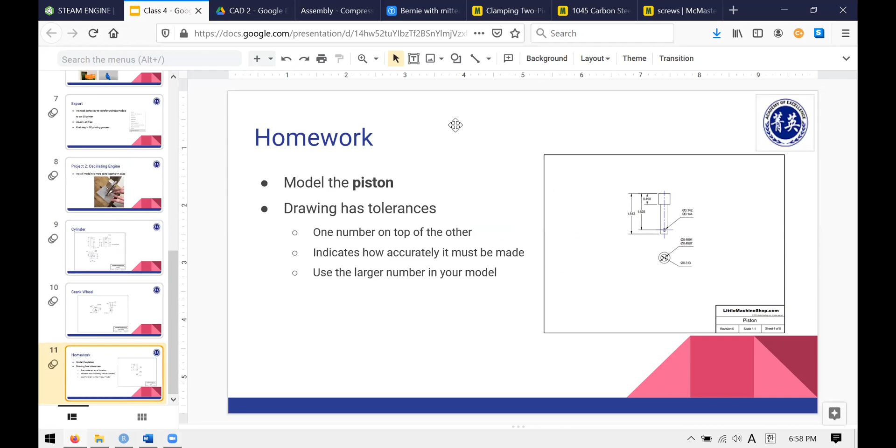So for next class, first of all, if you haven't done the base plate yet, I want you to do that one. And for next class, if you could model the piston, we'll be using that in the future. In terms of content, that wraps up today's class. If anyone has any questions about CAD or homework or similar topics, I'll be happy to take them now.